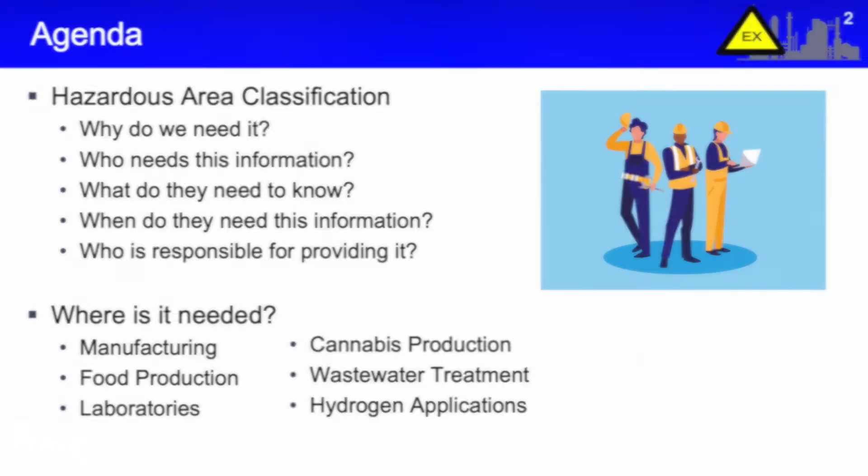And then we're going to put it in the context of a manufacturing facility, some food production facilities, laboratories. We're going to talk about wastewater treatment and something brand new in our industry, cannabis production and hydrogen applications. Both these areas have hazardous locations, and there have been some recent incidents that I'd like to bring to your attention, highlighting the need for proper design in these types of facilities.

So let's start with the need for classification. The best way to talk about this is to briefly discuss the fire triangle. I think we're all aware that in order to have fire or combustion, you need three things: you need oxygen, you need a fuel source, and you need a heat or ignition source. Now, when we talk about hazardous area classification, we're talking about that fuel side of the triangle.

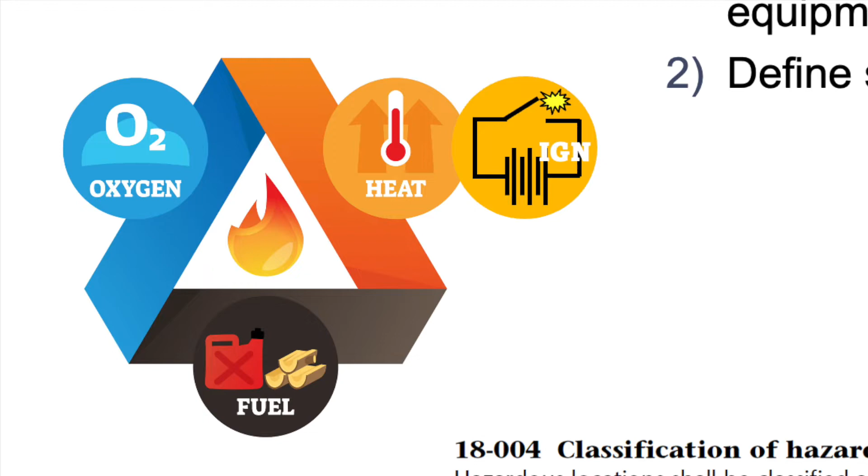We want to understand whether there is a hazard that exists, and it could be in the form of a flammable gas hazard, or it could be in the form of a combustible dust hazard. Now, this information is important because it helps us define the equipment certifications and the wiring methods for a facility, and this is all defined in the Canadian Electrical Code.

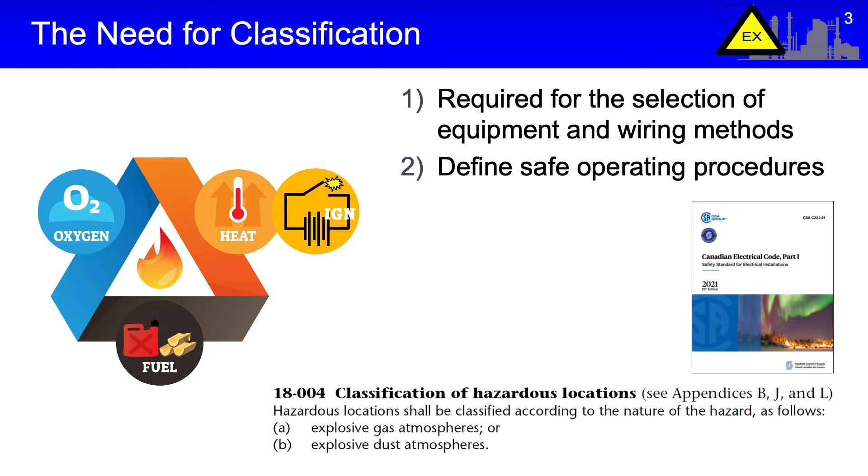In fact, the whole concept of a classified area comes from the Canadian Electrical Code in Rule 18004, where it basically describes what a classified location is.

Now, the area classification is also used by other people to determine safe operating work practices. It's a useful tool for conveying to your workers where the hazards lie. With the proper map, an employee or worker can determine where there's a possibility of a flammable hazard and take the appropriate precautions when working in those areas.

So it serves a dual function: it helps us select the equipment and the wiring methods, and it also defines the safe operating work practices in those areas. So where is it needed? Well, that's a simple question. Wherever there's a hazardous area class, or wherever there is a hazardous location, is where it's needed.

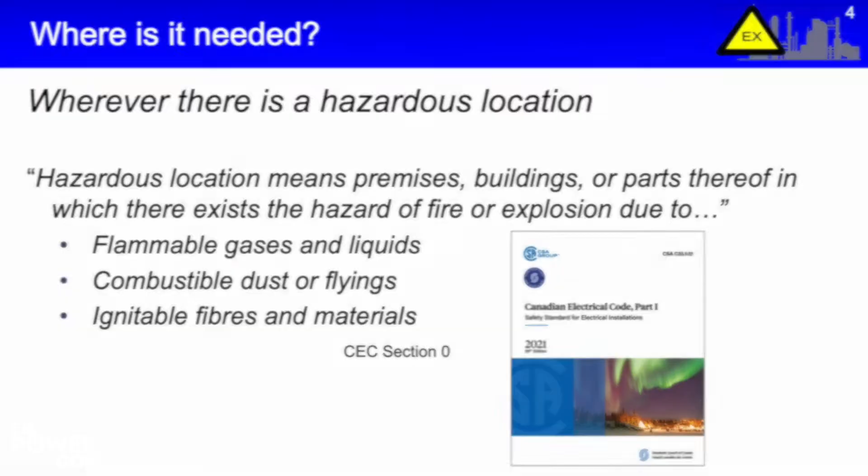And of course, as I mentioned before, this has been defined in the Canadian Electrical Code. The hazardous location is any location where there's a flammable gas or liquid, a combustible dust or flying, or an ignitable fiber or material that could ignite. And any location that has these sort of hazards, you are obligated by code and therefore by law to provide a classification design for your facility.

So on that note, I want to talk about several different types of situations where you'll have a hazardous location, and I want to premise it with some recent incidents in these types of areas. Let's start with manufacturing operations.

Very recently, a couple of weeks ago, we had an incident in the Ottawa area where a manufacturing facility was completely destroyed as a result of an explosion. We're not quite sure about the details, but the company suffered a catastrophic explosion where 6 people were killed and 2 were injured. You wouldn't expect a manufacturing facility constructing tanks to have this sort of hazard within its operations, but somewhere in that facility there was a large release of flammable materials that were ignited.

Another significant accident that happened in Canada was the Burns Lake, BC explosion. This was a sawmill explosion that happened in British Columbia, more than about 10 years back I believe. That explosion killed 2 workers and injured 19 people, and it was a result of a combustible dust hazard that was not mitigated.

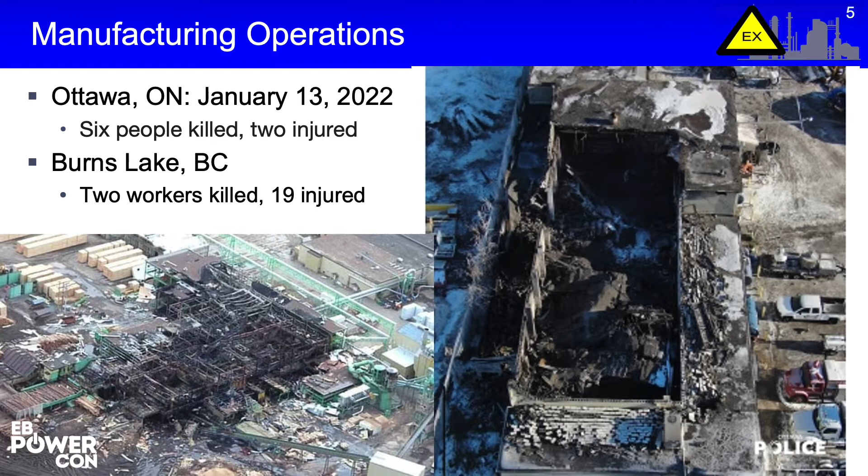The facility was handling sawdust from pine beetle logs that they were sawing up, and these logs were very dry, creating a very fine dust particle that settled on a variety of equipment. Somewhere in that situation, the dust was knocked loose and created a large explosive atmosphere within the building that was ignited by some device.

Unfortunately, a very similar accident happened a couple of months later in Prince George, BC, at the Lakeland sawmill, and again 2 people were killed with many others injured. These 2 incidents prompted Technical Safety BC to clamp down on a lot of the sawmill operations to ensure they were properly assessing the hazards within their facilities and taking the necessary precautions to ensure worker safety.

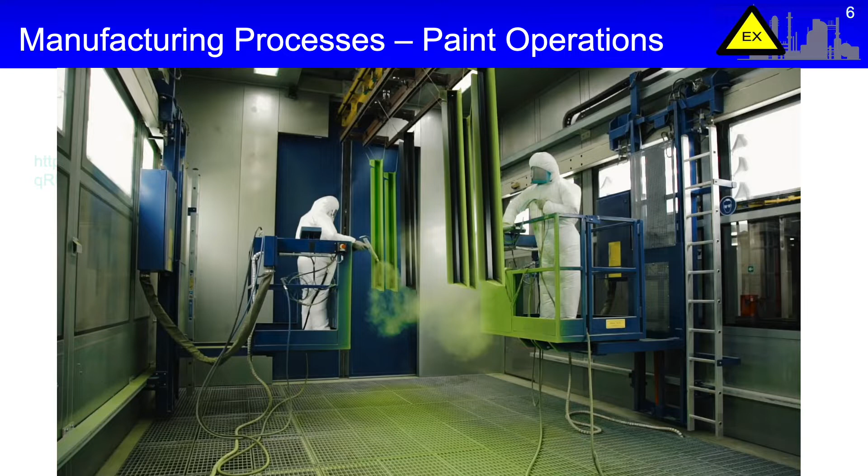Within any manufacturing process, there could be certain areas that have a classified location. One example is painting operations. We have a lot of manufacturing facilities in the automotive industry, for example, that have paint booths, and other appliance manufacturers that coat their products with different materials, many times flammable. So typically, when dealing with painting operations, there is going to be a classified area around these areas, and it must be classified in order to stay code compliant.

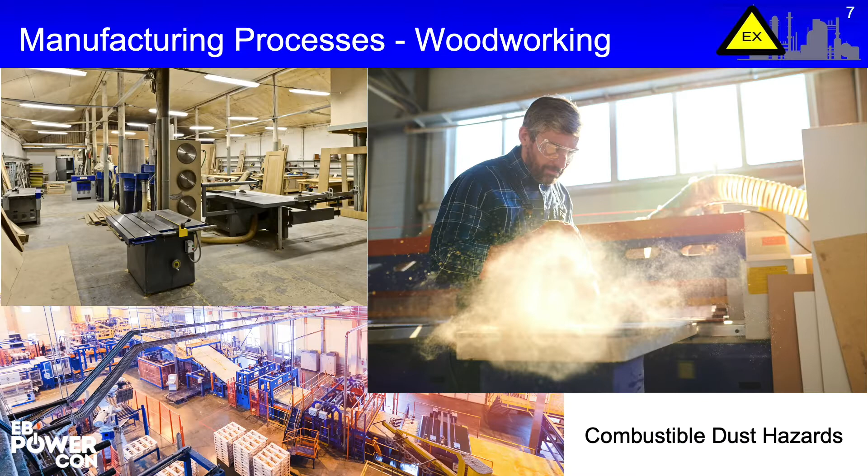The same goes for woodworking manufacturing processes. We discussed the sawmill incidents in BC, but when you take a 2x4 and cut it, obviously you create a dust hazard. Depending on the particle size and the size of your operation, the wood dust from these operations can collect on elevated surfaces and create a combustible dust hazard within the area.

Now, these types of applications can be a little bit challenging because a lot of the equipment in these areas is not hazardous rated, so they don't have a certification for a classified area. This means you have to deal with the hazard from an operational perspective, which means you have to be very cognizant of your housekeeping procedures in the area, which will have an ultimate impact on how the location is classified.

Before we move on, I do have a question for you about some of the things you've brought up, looking at that woodworking shop. What differentiates the woodworking shop with the dust and wood cutting they're doing versus somebody outdoors who's building a deck, sawing lumber themselves?

Well, the nature of the hazard is determined by whether the dust hazard is confined. You need confinement for an explosion to occur in a combustible dust hazard. If you were cutting your deck using a saw outdoors, there's very little probability you would have a fire or explosion because you're outdoors.

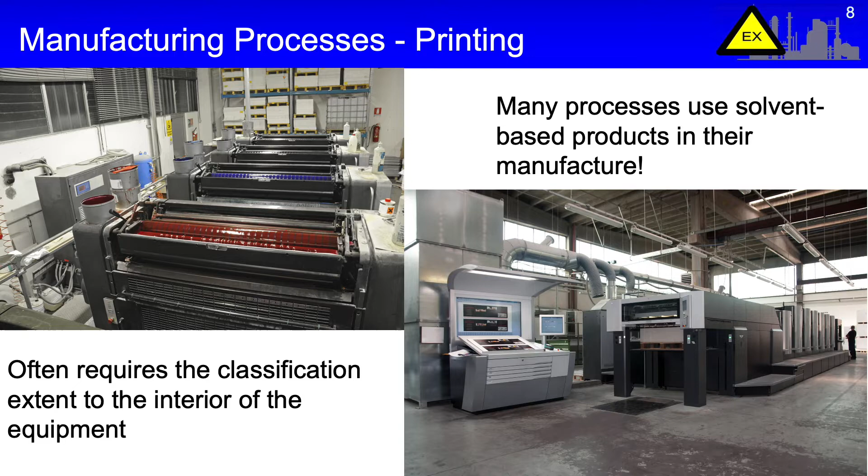Other manufacturing processes that often create a classified area that may not necessarily be acknowledged include printing press applications. A lot of these applications use flammable solvents in the inks, and when you have a machine using a fair bit of solvent that's open to atmosphere, you will have flammable emissions from the equipment itself. So you have to ensure that not only the equipment is properly certified for that application, but the surrounding infrastructure is also appropriately designed.

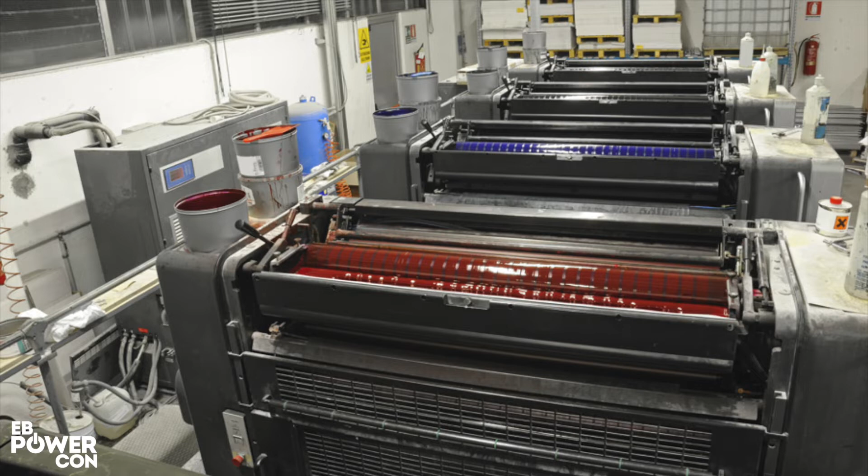On the left here, we have an open type of printing press operation, and you can see that the solvent there, if it was flammable, would actually evaporate into the entire room. So everything inside that room would have to be properly classified for a safe installation.

On the right, this is a more modern design printing press, and you can see that they've enclosed all the presses themselves, and they have an elaborate ventilation system to ensure that no flammable vapors can escape from the equipment. That allows you to basically use non-hazardous rated equipment in the vicinity of the machinery without creating a hazard. But again, this needs to be assessed.

So you do have to have some expertise in terms of determining what would be the extent of the classification surrounding this equipment. Now, in many food production facilities, we also have hazards, typically combustible dust type hazards. One of the more significant events that occurred with respect to food production facilities was the Imperial Sugar refinery explosion back in 2008.

This was a manufacturing or food production facility in Georgia that packaged sugar. They had massive conveyor lines and silos, and it was quite a large operation. Unfortunately, they didn't pay a whole lot of attention to housekeeping in this facility, and an unfortunate event occurred which caused an explosion that caused 17 fatalities and injured over 40 people.

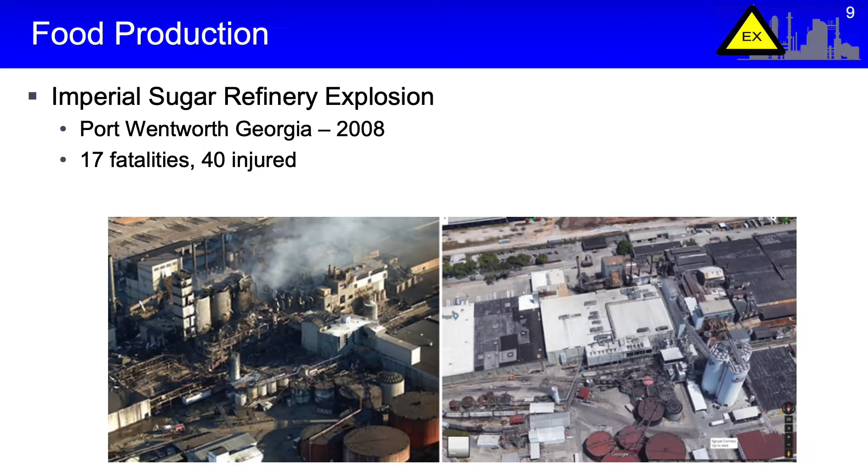This event was very significant, particularly in the US, because it prompted OSHA, Occupational Health and Safety in the US, to clamp down on facilities that handle combustible dust. Following this incident, inspectors came down hard on a lot of facilities that had combustible dust hazards. It also prompted an education program for industry in making everyone aware of the hazards and potential dangers it could cause.

Now with food production, it's all about powdered ingredients. The ingredients are crushed, moved, conveyed, and bagged, and all these types of facilities can create combustible dust emissions, and if we don't mitigate these emissions, they can create a hazard over time.

As I mentioned before, when you're dealing with combustible dust hazards, your first line of defense is housekeeping. You have to have a good, solid housekeeping policy in place. For the most part, this housekeeping policy will have a huge impact on the area classification design for your equipment.

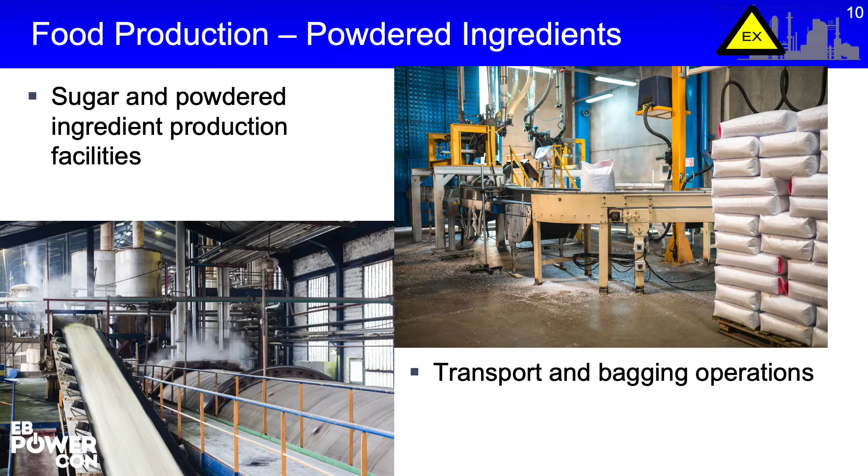So if you can maintain a clean environment, it's very possible that the majority of your equipment can be designated non-hazardous from a certification perspective. But if you have combustible dust accumulations on surfaces and elevated surfaces, that changes the classification, and it drives you towards equipment that needs to be certified for the location. In many cases, that equipment may not be available. So the whole idea of designing a food production facility has to be coordinated with the classification design and the equipment you buy.

Another application with respect to food production that often comes up is distillery operations. Of course, alcohol is flammable, and particularly when you get into large quantities, these distilleries start to look like little refineries, and you have to ensure that the workers handling the materials in these facilities are kept safe.

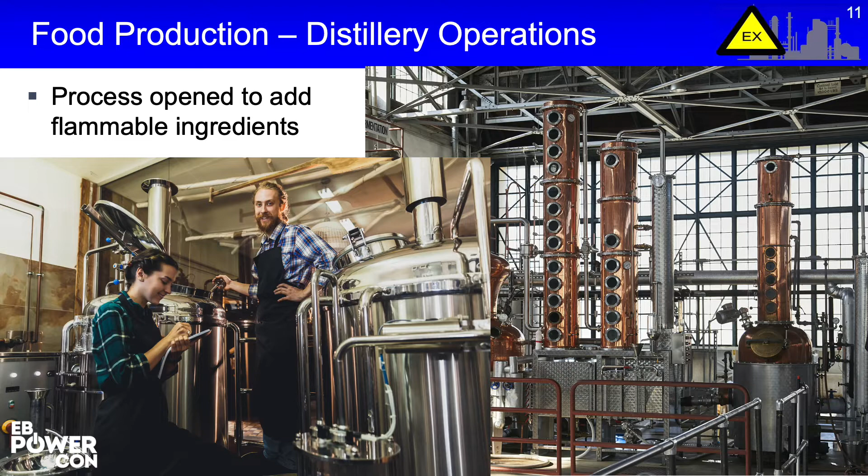This is particularly true when you're opening and closing vessels. If you're adding mash to a vessel to create whiskey, rye, beer, or otherwise, just the fact that you open that vessel means there could be a release of flammable materials, and if there's an ignition source in the area, it could potentially create an explosion or fire.

This is one area I see in my experience that tends to be overlooked. People, when they buy the equipment, don't necessarily realize that it could create a flammable atmosphere, and it needs to be considered before you buy your equipment, because it could be a very expensive mistake to make if you don't buy the right equipment for the classified area.

I'm glad you brought up distilleries and spirits, wine and beer and stuff like that, because you've probably noticed this as well: the popping up of a microbrewery here, microbrewery there. One would hope they're taking this good information and applying it to their operations.

Well Anthony, you're absolutely right about that. But in my experience, a lot of these microbrewery type operations don't think about this until after the fact, after the facility has been constructed and all the equipment installed and interconnected. Then the electrical inspector comes along and says, well, where's your classification documents? And he won't give the connection permit until he's satisfied the hazard has been addressed.

Again, this is another one of those situations where you have to have an assessment done. The vast majority of laboratory equipment out there is not hazardous location rated, which means you have to create a non-hazardous environment within your laboratory environment. And this involves, to a large degree, ventilation design.

So you start off with the objective: okay, I need a non-hazardous area so I can place my equipment in this area. What do I need to do with the ventilation system to have sufficient air movement to dissipate any hazard? Generally that can be done through fume hoods or otherwise, but if it's not done properly, you can end up with some situations like we have here.

For example, the University of Hawaii had an incident in 2015 where a researcher was injured. What was happening there is within this laboratory, they were preparing gas mixtures using hydrogen, oxygen, and carbon dioxide. Somehow through the transfer process, there was a spark that created an explosion, and that resulted in the lab being destroyed.

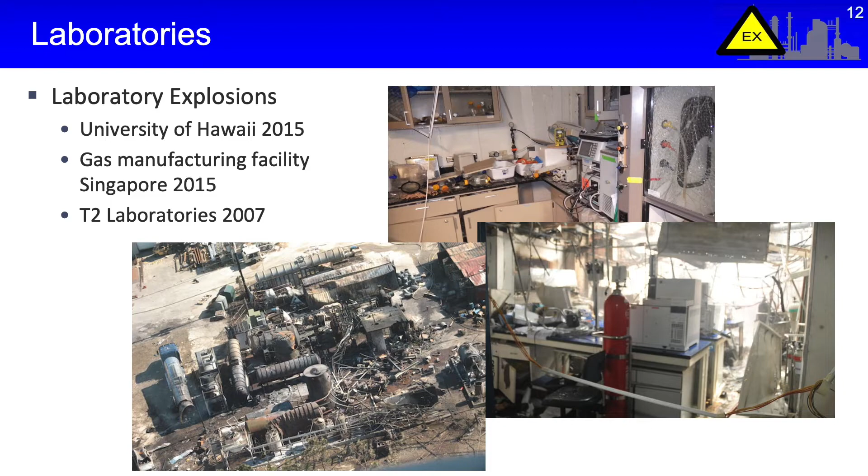There was another facility in Singapore in 2015. This was a gas manufacturing facility that had a lab within their operations to test their product and such. Again, there was a release inside that lab, it found an ignition source, and an explosion occurred, resulting in one death.

One of the more significant explosions occurred at the T2 Laboratories in Florida back in 2007. This is another one of those landmark incidents that prompted OSHA to take action. In that particular facility, they were manufacturing gasoline additives, and they had a certain process that was exothermic. They had a runaway exothermic reaction that they couldn't control, resulting in a major explosion.

The interesting part about this particular application is that it was kind of a scaled-up laboratory process, and they had run this experiment almost 175 times without incident. Then one day they ran the process simulator, or the process, and it exploded.

Just because you haven't had an accident in the past, it doesn't mean you won't have one in the future. It's something to consider. Just because you may have been lucky up to that point, you certainly don't want to be relying on luck to maintain the safety of your facility.

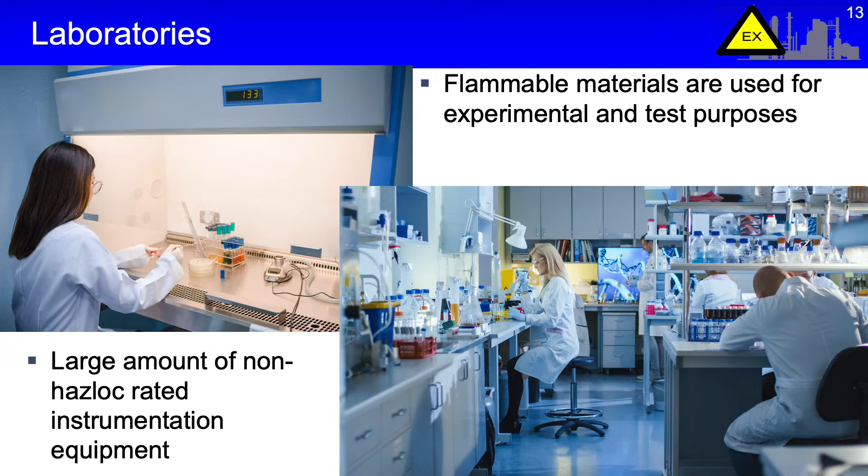This can create a rather complex ventilation scheme for a laboratory environment, and it needs to be factored into the cost of designing and constructing a laboratory. So, one of the more challenging applications we see in the hazardous area classification world.

Now, another industry where we see a lot of hazardous locations that are maybe overlooked in many facilities is wastewater treatment. We've seen some accidents in the wastewater treatment side of the business. We had an accident in Pickering in 2014 where we had an odor control building that was basically designed to remove the stink from the wastewater treatment process. But of course, when they remove these odors, there's a certain amount of flammables in the air or in the process stream there.

In this particular situation, there was a buildup of methane gas resulting from the process that caused an explosion and fire in the treatment plant, effectively shutting it down. Fortunately, no one was injured in this particular incident, so that was very fortunate.

There was another major explosion in Avonmouth in the UK, where 4 workers were killed and a 5th injured. That was part of the process where they were processing biogas from the sewage, and somehow an ignition occurred, blowing the roof off a storage tank, injuring workers in the vicinity.

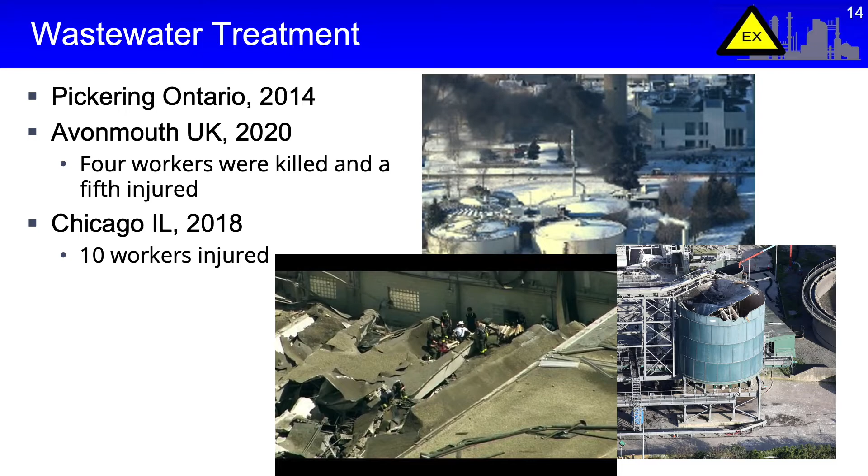And a very major explosion occurred in a water treatment plant in Chicago, Illinois in 2018, where again 10 workers were injured. So wastewater treatment, when you're dealing with these types of facilities, they do warrant a classification design.

With wastewater treatment, it's kind of an interesting process—interesting in the fact that it's a biological process that creates the hazard. It's not like a flammable gas release where you have flammable gas contained by a pipe that is suddenly released, creating a flammable atmosphere.

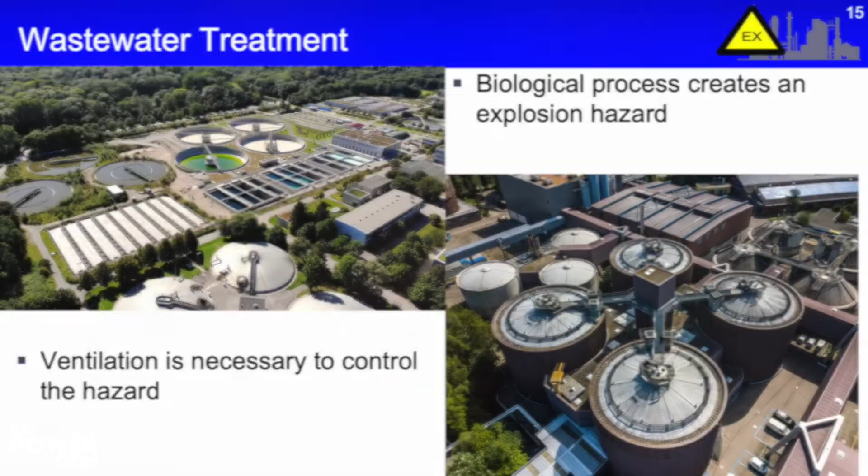It's a slowly evolving process. As the sewage decomposes within the process, methane is given off, and if it's not properly ventilated, it can build up in enclosed areas.

Now, mitigating the hazard in wastewater treatment is not a difficult process. You just simply have to ensure that you have adequate ventilation within your buildings and enclosed areas. If you have that in play, the likelihood of an explosion is extremely low. So another good example where ventilation plays a huge role in the safety of the installation.

I'm glad you bring up this example of wastewater treatment plants and specifically biogas, because that is something I hear, read, and report on more regularly these days—communities trying to get energy from their wastewater operations. So I'm hopeful they'll take note of this slide.

Historically we used to just flare off that usable energy, and now we're collecting that energy, compressing it, and giving it to the utility. They can sell it to their customers, and when you start adding these types of equipment to the process, you get into compression, and it starts to look a little more like a petrochemical facility than a wastewater treatment plant. At that point, you're dealing with pipes with gases, and it's a little more straightforward from the classification perspective.

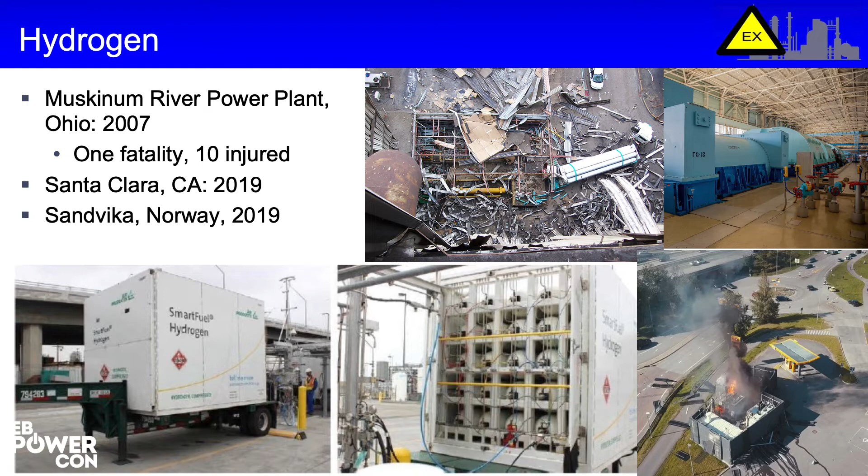And of course, there's some discussion about hydrogen fueling stations for vehicles and cars, and we can see this for long haul trucking too. We're going to see a lot of refueling facilities there. We had an explosion at a hydrogen fueling station in Sandvika, Norway, and the blast was so large that it actually set off airbags in nearby cars. So just to give you some idea of the explosive power of hydrogen.

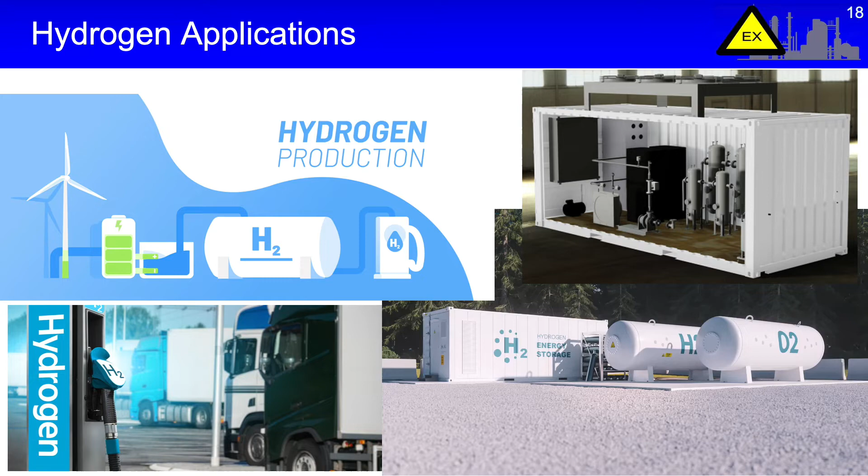So with hydrogen applications, these are going to be challenging applications, especially in the environment moving forward. Historically, most of the hydrogen manufacturing operations were contained within large industrial facilities. They're used for hydrocracking, for upgrading, and for other industrial uses. And generally speaking, when you have a process contained within an industrial facility, they're properly engineered with an appropriate classification provided, and the hazard is properly assessed.

However, moving forward, we're going to be going into a kind of decentralized hydrogen implementation where we're going to have separate modules scattered all over the place. They could be adjacent a wind farm, they could be adjacent a fueling station, and a lot of these smaller applications want to package everything in a sea can or something similar for portability. This means that the classification design of that sea can needs to be carefully considered, because you'll be placing these things a lot closer to where the public is, and a lot of the equipment we're finding, particularly in electrolyzer type applications, is not necessarily hazardous locations rated.

Which means that, again, you have to go back to a ventilation design. With hydrogen, for the most part it's not terribly dangerous in outdoor applications, because it's such a light molecule, it rapidly dissipates on release. However, if you enclose a hydrogen application, then it becomes dangerous. Even a very, very small leak will cause a pool of hydrogen or a hydrogen gas cloud to collect in the upper areas of that structure.

And if you have some equipment in that upper area, it could be a light or perhaps a heater, a fired heater or something like that. If the hydrogen contacts that, it can explode. And you may not even detect it at floor level, but at ceiling level you have an explosive atmosphere. So particularly with enclosed hydrogen applications, it warrants an extra degree of care.

The other thing about an area classification is it's premised on the flammable mixture being present under normal and defined abnormal conditions. Now, a lot of the accidents I reviewed earlier are what we call catastrophic events. This is where a large amount of material has been released, and of course it found an ignition source of some kind and created the explosion.

But when we deal with a hazardous area classification, we're looking at a process under normal operating conditions, and we expect that there's going to be a small amount of material released. And so if there's a small amount of material released, we have to ensure that any equipment in that area is properly certified so it doesn't create an explosion hazard.

You can't assume that every process is tight. That's bad thinking. You have to assume that there will be leakage from your process, and you have to mitigate that leakage by selecting the appropriate equipment or operating procedures.

Now, really important, and this is a mistake made all too often, is that people buy the equipment before they do the classification design. This is bad news, because what often happens is you begin to force a classification design rather than properly assess the hazard. Now, as I mentioned before, there are some situations where you can't get equipment in a particular certification design, and there's ways of mitigating those types of situations.

But where it becomes a problem is when someone purchases a piece of equipment and then wants a classification to meet the certification requirements of the equipment, and that is ass backwards.

You have to assess the hazard first, and then you buy your equipment. If you do the opposite, you buy a piece of equipment and then you do a hazardous area classification, there could be the possibility that the equipment you purchase is not suitable for the environment. And then at that point, you have a problem.

Either you have to retrofit that equipment, or you have to return it to the manufacturers if that's even possible. Whatever happens, it's going to be expensive. And so you're much better to get your classification design done early in the project. Make sure you understand the hazard, and then select your equipment, and that reduces any kind of risk of this sort of mistake being made.

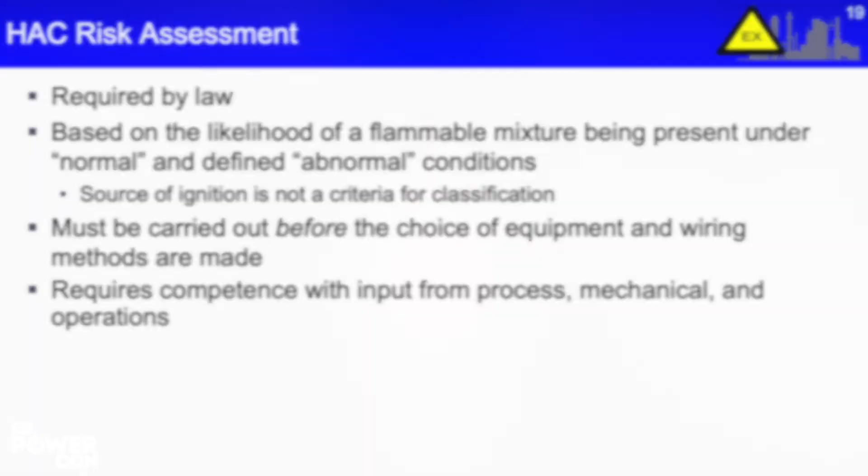The other thing I want to say about this whole classification design process is it's a multidisciplinary process. It's required by the electrical engineers and the electricians because it impacts the equipment and the wiring methods they use. But the actual process of doing a classification design has nothing to do with electricity. It has everything to do with chemical processes, mechanical containment, and ventilation. These are topics typically outside the discipline of electrical. And so you have to recognize this.

And so when you are creating a design, you have to make sure that you have the appropriate people involved, or at least understand the key factors in performing the analysis and ensuring that it's properly done.

Now, once we've got our classification design in place, there's going to be a number of people that are going to use this information, and at this point it becomes a very important document, because for one thing, the engineers using this documentation are going to basically buy the equipment based on the specifications provided by the classification design. It also impacts equipment placement. The design of your facility is going to be impacted. How close the equipment needs to be to sources of release and such will have a big impact.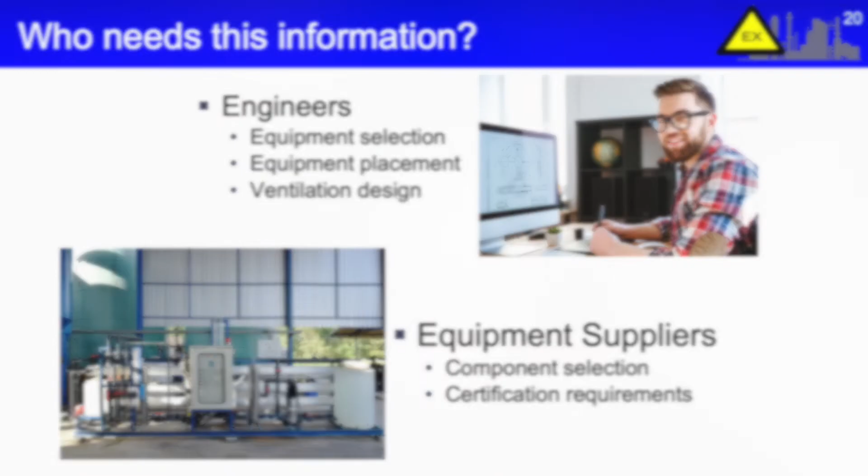As I mentioned before, you need to have an engineer involved doing the ventilation design in these facilities so that you have sufficient air movement to mitigate the hazard as best you can. Once you have this information, you're going to buy equipment from a supplier, and the equipment supplier needs to know this information too, because it impacts the components he incorporates into his skid packages.

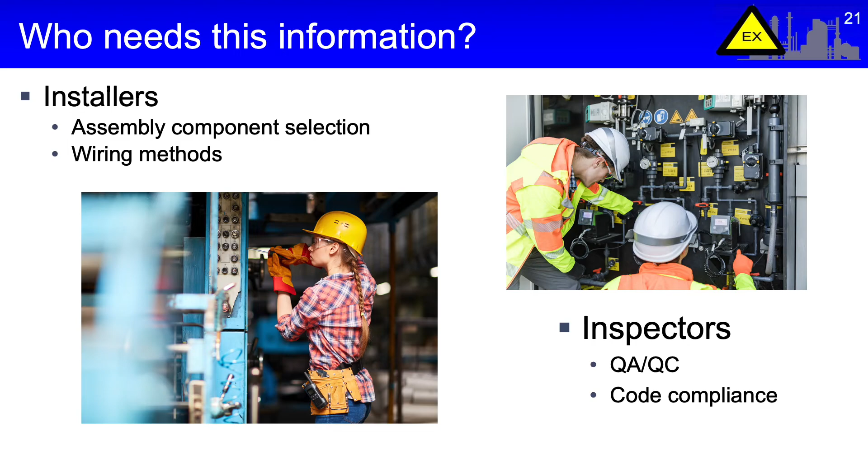That's a function of the certification requirements of the end use location. Installers, the electricians, use the Canadian Electrical Code to install equipment in facilities, and Section 18 within the Canadian Electrical Code deals exclusively with hazardous locations. So if an installer doesn't know what an area is classified or what the classification can be, he really can't do his job.

And of course that's going to lead to problems when the inspector comes along. The inspector is going to want to see that this area has been properly classified, and then he's going to ask for the documentation. He's going to look at the documentation, look at the installation, and then make an assessment as to whether it's code compliant or not. If he doesn't have that documentation in place, he can't make the assessment. He just goes home and leaves it up to you to get that assessment done after the fact.

And of course that becomes problematic, because now you're back in that chicken or egg thing, right? If you haven't done the classification but you bought the equipment, and the equipment isn't appropriate for the classification, you have all of a sudden a very expensive problem. So again, this needs to be done in a sequential fashion so that you avoid these types of situations.

And the other very, very important people that need this are your own workers, the operations people. They need to know where the hazard exists and what the nature of the hazard is, because as soon as you have certain activities within a classified area, it triggers a number of occupational health and safety considerations, which might be related to safe work procedures or hot work permitting.

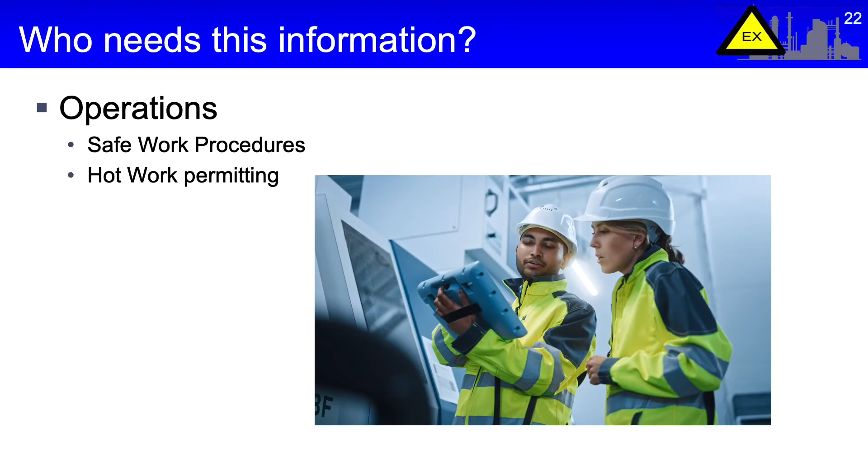In many facilities, what they do is use the area classification plot plan drawing as kind of a hazard drawing, and they post it in a prominent location so that any workers, if they're working in that facility, can quickly verify where the hazards are and where they're not, and what they can do in each area. It becomes a working document over the life of the facility, rather than just a design document that's only used during construction.

So it does have a lifespan, and it should be maintained over the life of the facility for this very reason.

So with respect to a classification design, what do they need to know? Well, first of all, they need to know the zone or division classification. This directly impacts the type of equipment that's suitable for the area. They need to know the extent of the area - where the classification ends, where I can use equipment certified for HAZLOC, and where I can get away with just non-hazardous rated equipment. That extent becomes important. The group classification is related to the characteristics of the materials themselves.

The group classification will impact the design of explosion-proof enclosures and intrinsically safe circuits within classified areas. Last but not least is the auto ignition temperature of the flammable materials. This is related to when the materials will self-ignite due to surface temperature. The Canadian Electrical Code stipulates that you can't install equipment that operates at surface temperatures exceeding the auto ignition temperature of the flammable materials.

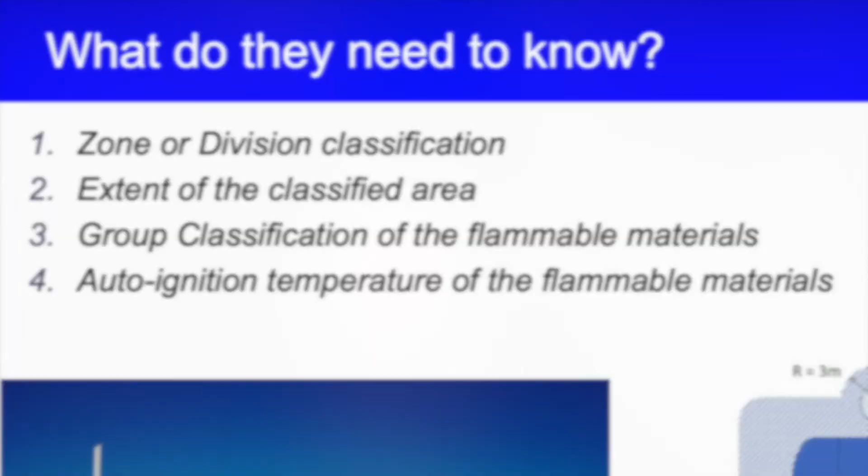So you need these four pieces of information before you can select your equipment or select the appropriate wiring methods for your particular facility. So if you are reviewing documentation or creating documentation, you need to ensure that these four key pieces of information are included.

So when do you need the information? Well, as I alluded to before, in the early stages of the project, it's highly recommended that you do a classification design or a preliminary classification design before you purchase any major equipment. This is to avoid the possibility of selecting the wrong type of equipment for the hazard that's present.

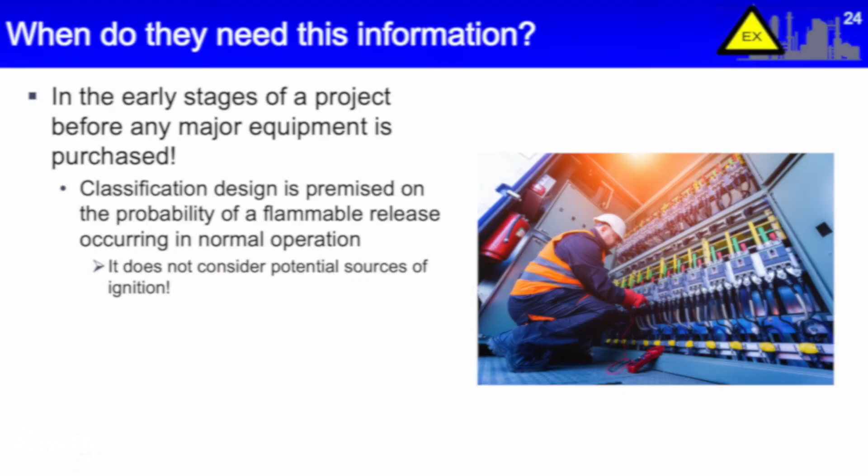In many cases, in larger facilities, you may have to have a preliminary design where the classification design is based on preliminary design documents, and then optimize later during the detailed design phase, where you can optimize the extents of the various classified areas and fine tune the documentation - you might call it optimized design. But it's very important that you consider it early in a project. I would not ever recommend waiting till the last minute to get this documentation. Typically, if someone is calling about a last minute area classification design, it's because the electrical inspector is asking for it, and that's way too late.

And who's responsible for providing it? Well, it's the owner who's responsible. The owner is responsible for ensuring that he provides a safe work environment for his workers, and it's up to the owner to contract the appropriate technical personnel who are competent in doing this task.

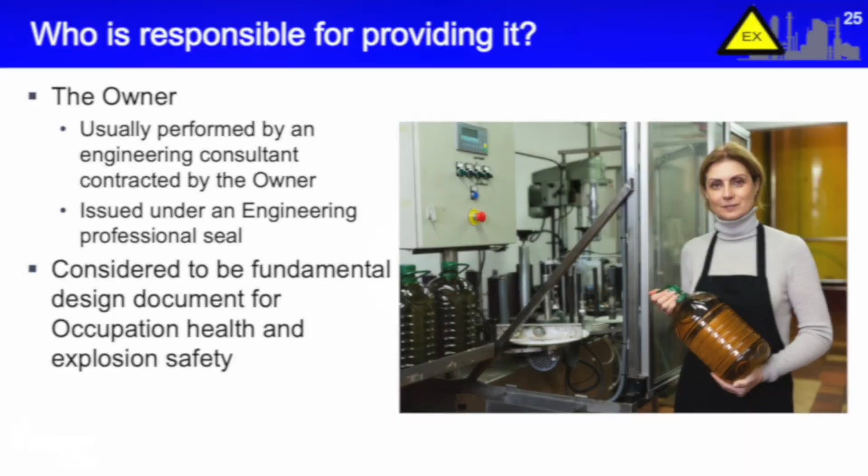Generally, competency is going to be somewhat related to the industry or the specialty of the person doing the classification design. I would also like to indicate that the Canadian Electrical Code requires that the classification documentation be issued under a professional seal, because this is a key safety document related to occupational health and safety.

By applying a professional seal to a classification drawing, you're indicating that you're competent in doing the work. And I think it's very dangerous to do this task without understanding the nature of the materials, the nature of the hazard, and being properly trained in performing this whole task. Competence is one of the biggest challenges we have in hazardous locations at the moment.

Over the years, it's becoming increasingly complex, mainly because we are adopting IEC standards and creating new criteria for assessment and such. So I would not advise anybody to take on this task unless they feel that they have some competence in doing it, because by applying that seal, you're indicating that you are competent in performing it, and your customer is assuming that you have the competence to deliver a good design.

And to that note, in 2015 the Section 18 subcommittee for the Canadian Electrical Code recognized that there was an issue of competence with respect to hazardous locations. So they created a new appendix, Appendix L of the Canadian Electrical Code, which has an extensive list of engineering guidelines related to hazardous area classification.

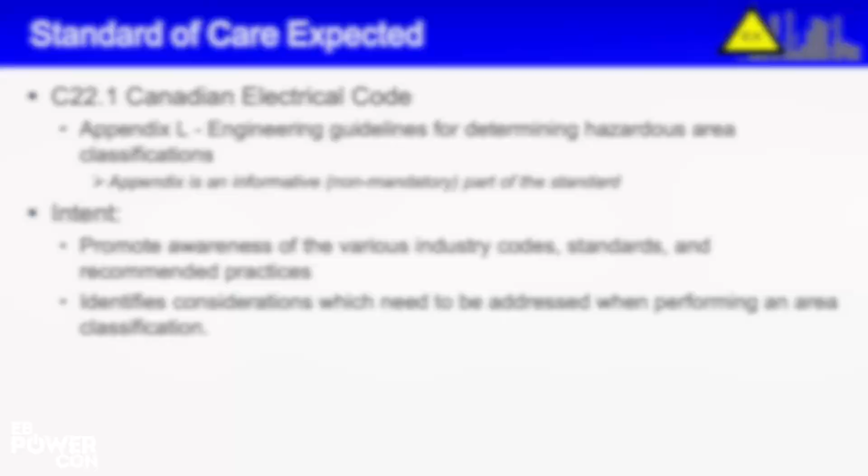It talks about some of the considerations you should have related to classification design, and it talks a lot about the documentation requirements. Historically, many designs have never been properly documented, and this is problematic because if you ever have to go in and modify a design that's just simply based on a drawing, with no supporting documentation, it's very difficult to know what the premise of that drawing might be.

I myself have done this on many occasions and simply said, listen, if you don't have a documented design, I can't touch it because I don't know what the original premise was, and I'm going to have to start over. Rather than updating a document that's only for a small part of the premise, I end up having to do the entire premise because it was never properly documented in the beginning.

So I highly recommend that when you do a classification design, or receive one, that you have some sort of background documentation that supports the rationale for the design. And when you have that in place, then you have a design that can be maintained over the life of the facility.

With that, I think I don't have much more to say. Anthony, do you have any questions? One of the things you highlighted a few times, because I was taking notes here, is the importance of housekeeping being very key.